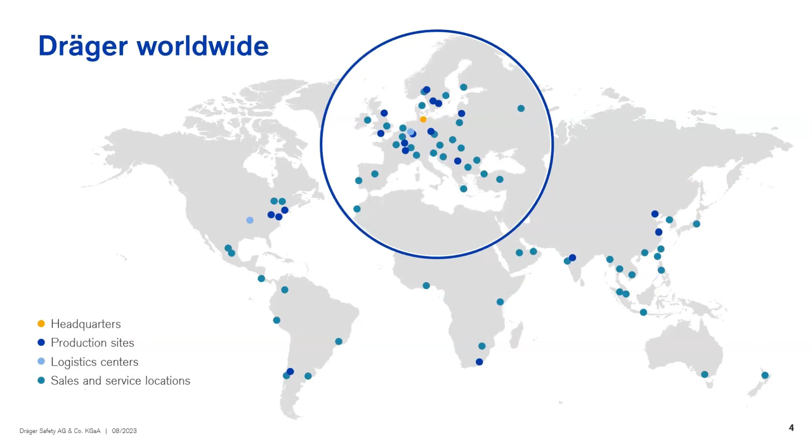Okay, so that's briefly all for the moment. Now it's time to have a look at the details about our topic today: some risks of gassing and asphyxiation in the special application of maintenance work. That's the part where I would like to say good luck and see you in a second. Thank you, Oliver.

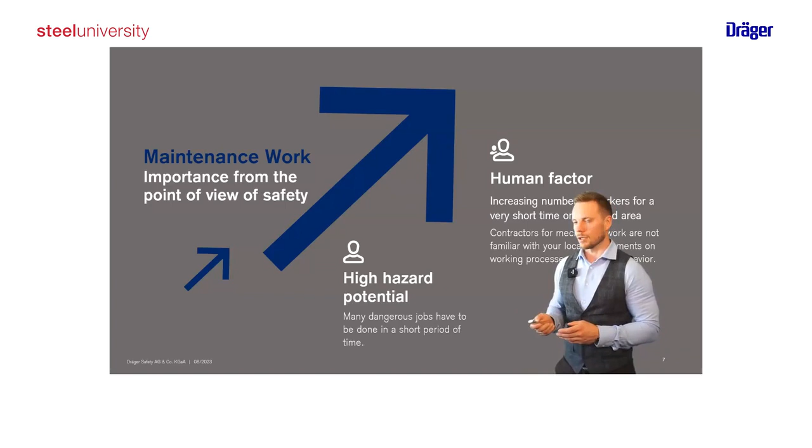In the last presentation in module 3, we already gave you some information about the risk, where they come from. In this first slide, I'd like to give you a small review to that. So when does the risk exist?

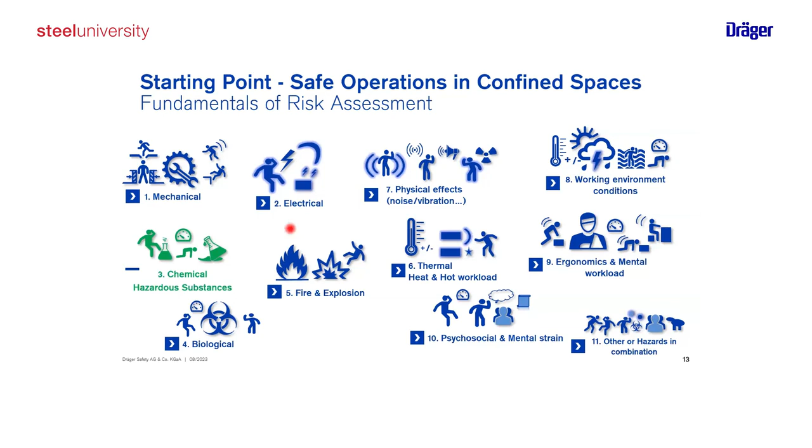In the last module, we did a very detailed look at all of these risk assessments and the fundamentals. Today I colored this one green - we want to focus on this topic because it's related to gassing and asphyxiation. We are talking about chemical hazardous substances that come through inhalation into your body and harm you there.

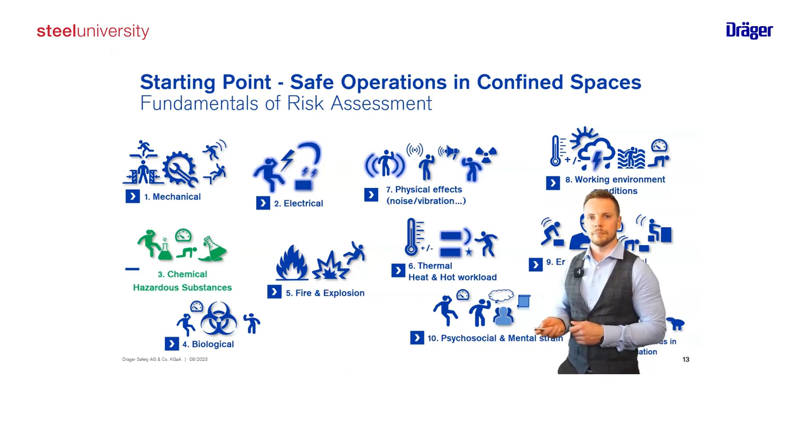But first, I'd like to show you a chart of the top 9 causes for fatalities in the steel industries from 2017 until 2022. There you can see the top 3 causes: fall from height - you may have heard a lot about this topic in the last year - and moving machinery, so mechanical hazards, also one of the most important points. And in 3rd place, we find our topic today: gassing and asphyxiation.

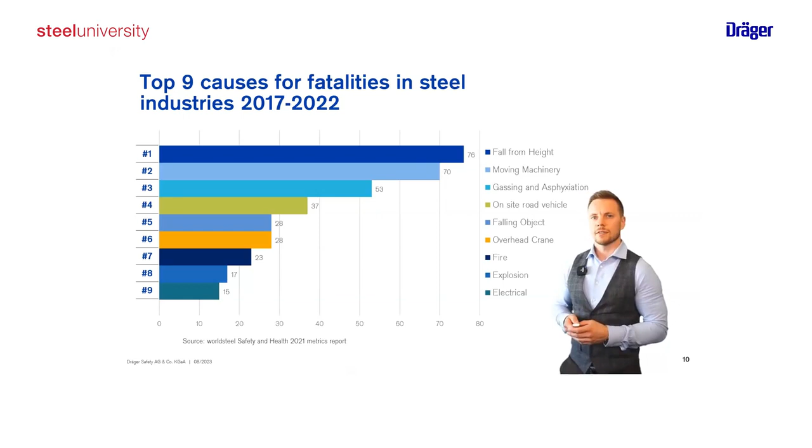So this is very important for your daily work, and especially for your work at maintenance time. Let's get a deeper sight into that.

The risk of gases and vapors - we have 3 different kinds of them. The danger of poisoning by toxic gases, for example. You can see them on these small symbols on every vessel or container. For example, we are talking about carbon monoxide, chlorine, H2S, and so on, and they are measured at the parts per million level, ppm.

Then we have the second part: the danger of explosion, which is caused by flammable gases and vapors, for example methane, and they are measured in volume percent.

And the last part, or the 3rd part, is the danger of suffocation - that's one of our topics today - for example due to the absence of oxygen, and this is also measured in volume percent.

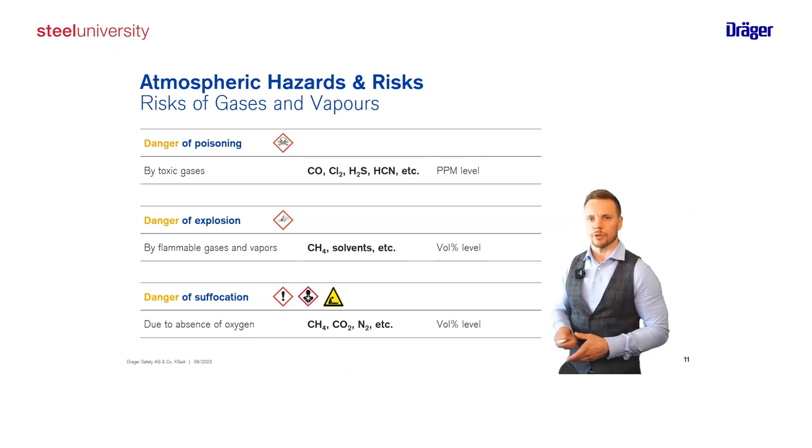Just a small view in our breathing apparatus. We inhale our normal air from the mouth or the nose, and that goes down into the lungs, the bronchi, and the diaphragm. And most of the hazardous toxic materials harm you there.

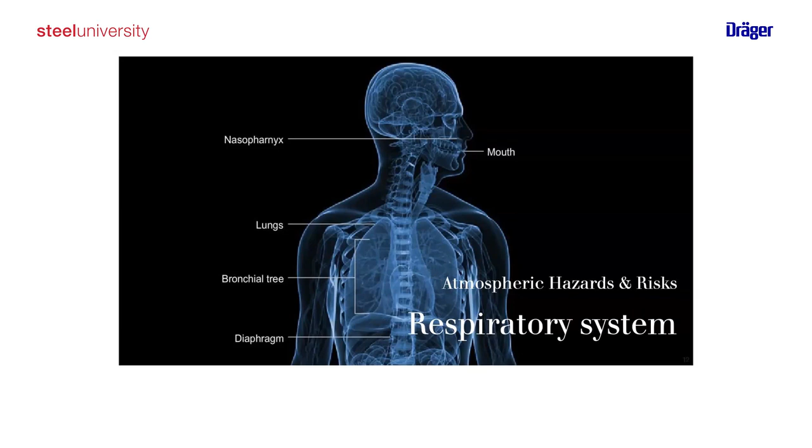This is also a small repetition from the last time. I think the most important substances in the steel industry are for sure carbon monoxide, also sulfur dioxide, and we have an increased topic for explosions, for example, made by hydrogen. That's one we are facing in the future, and also today more and more. But also ammonia for transportation is an important topic that becomes more and more important.

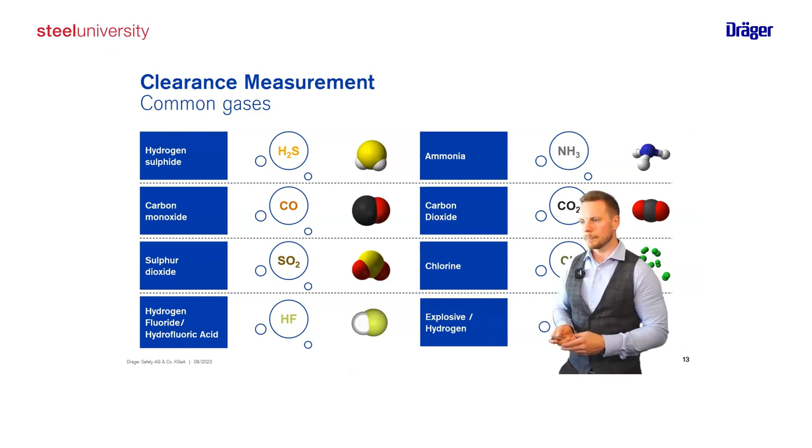Yeah, clearance measurements for common gases. So we have a lot of safety challenges in the steel industry. We have extreme temperatures, noises made by heavy machineries for example, and the steel is produced under some of the toughest conditions. That's nothing that I could tell you new. You are working with all of this every day, so you are the experts in how to produce steel.

Carbon monoxide, that's one of the greatest dangers, one of the most dangerous substances that we are facing in the steel industry. Because every fire, every production step will produce carbon monoxide.

But what makes it so dangerous? Carbon monoxide is not perceived by human senses, as it appears colorless and odorless, so you can't smell it. Nevertheless, it's very toxic and highly flammable, so that's something that you have to know.

One breath in, CO attaches to red blood cells, suppressing the body's oxygen intake, and therefore we need continuous monitoring for carbon monoxide in our ambient air and in the personal protective equipment. That is one of the essential things that you should be thinking about.

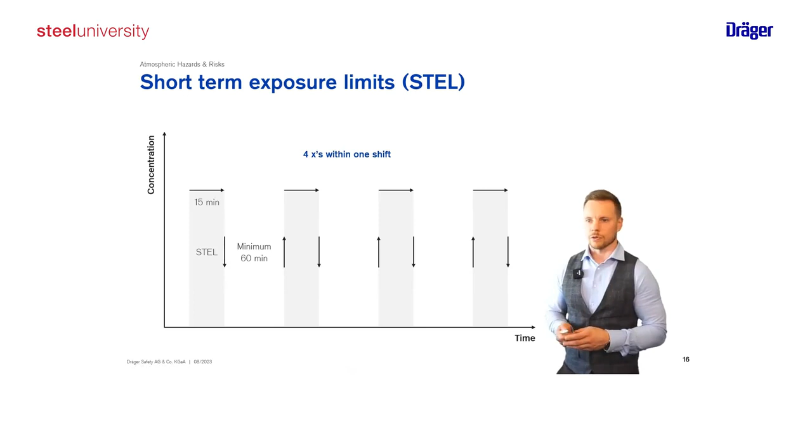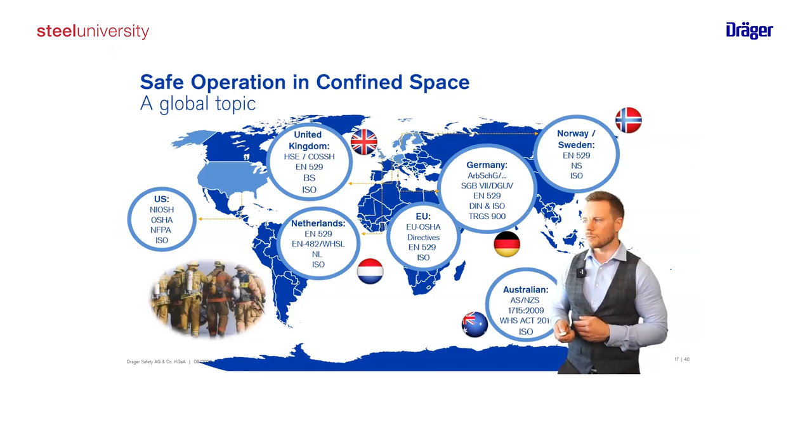Okay, but let's think about where all these toxic substances come from. We have 4 different sources that they come from. So the first one is dangerous substances come from the process itself. If you produce something, if you burn something, then you produce, for example, carbon monoxide, or sulfur dioxide, or whatever. So out of the processes, this is one source for dangerous and toxic materials.

But you can also produce dangerous concentrations with the working process. If you're thinking about welding, for example, you could produce carbon monoxide. So that's the second source where toxic materials can come from and influence your breathing.

And also from external processes, maybe if you think about having maintenance work just in one place of your site, and the other places are still in a production process, and maybe they have a leakage or something, then the working places in the surrounding area could be in contact with that and could be in danger of the leakage with the toxic material.

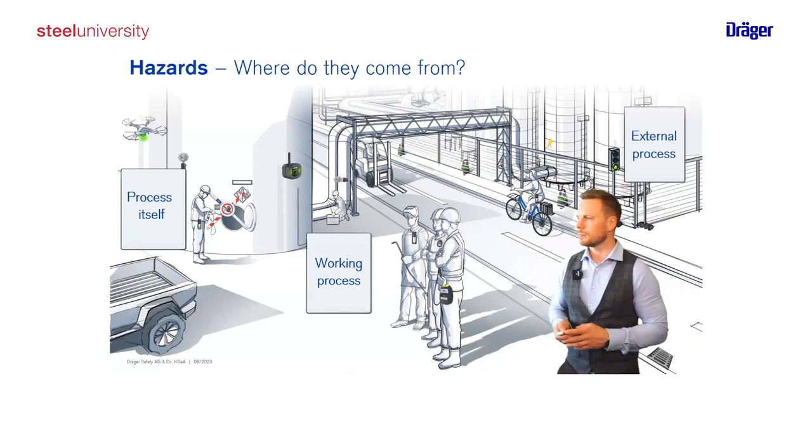And the fourth one, I already teased it now, is the leakage detection. So like you can see here in the picture, if we are working in a vessel, here we have a confined space, and this person is also well equipped with a protection suit and breathing apparatus, and there comes a toxic material out. The people in the surrounding area have to go away because we have a toxic area that could harm them. So they pull over their rescue mask and go to the safe place over there.

On the next slides, I'd like to tell you something about how we could reduce these hazards, and I'd like to show you this on a practical example, going from the planning of the turnaround to the maintenance work itself, and back to the production process.

So we come from the operational production mode in your steel industry. We have dangers like heat, noises, and gases like carbon monoxide, and therefore you have your fixed gas detection devices as part of the fixed gas detection system. You do your daily business with well-trained personnel. That's the situation you are very familiar with.

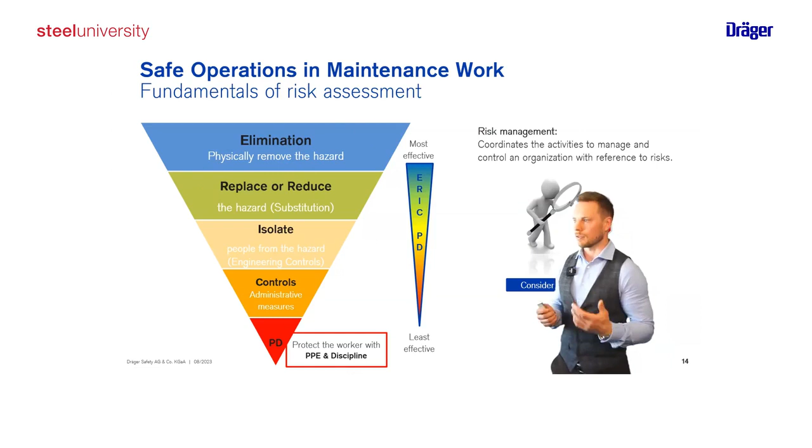And therefore, like I told you, clearance measurements are very important. For clearance measurement, you have to make sure your gas measurement devices are equipped with the right sensors, and that they are well tested and equipped when you need them. Please remember the dangers: suffocation, explosion, and also poisoning. They are very important to have the right planning for your clearance measurement.

But let's go further with our turnaround planning. The next step after planning our maintenance work is to prepare the work itself. For example, training—you trained your own personnel in the last step, and now it's time to train the contractors who come to your construction site to give you support for your maintenance work. First priority is always safety.

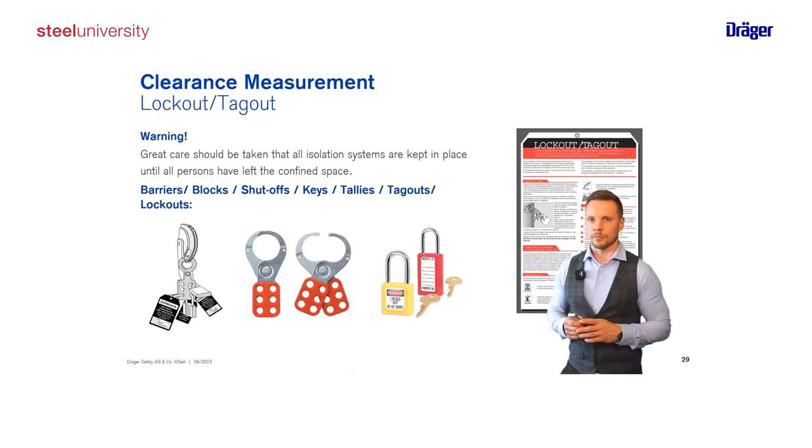And for this, one important thing is lockout, tagout. You always know the procedure. Great care should be taken that all isolation systems are kept in place until all persons have left the confined spaces. So in this part, just make sure of that, that's one point on the next slide here.

Verify the lockout, the test machinery to make sure it can't start up, for example. And after that, attach the lock and tagout devices so that nothing can start up again.

The isolation of the energy is also one part of this procedure. Isolate all energy sources by blocking, bleeding, and venting. Stored energy as found in springs, hydraulic, and pneumatic systems, you already know that. The shutdown equipment should be right in place.

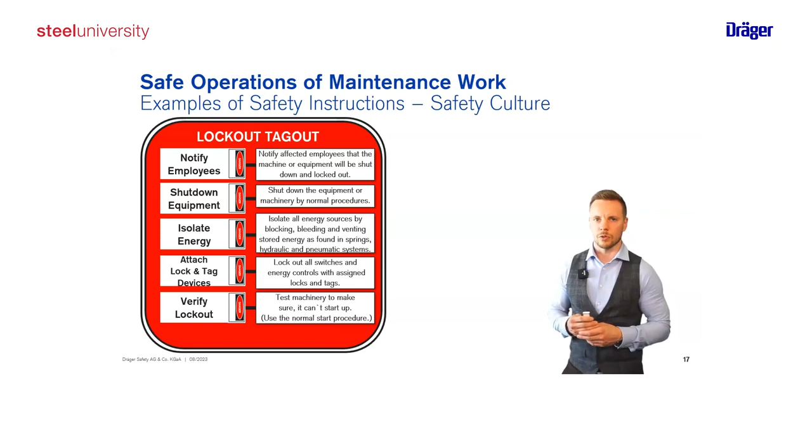And the last step, also very important, is that you inform and notify the employees. On this step, it's also important to train your contractor people and also your own people about safety culture. A safety culture usually starts with the first training to give them the advices, maybe 10 rules.

These are just examples, but they are quite well for every production site and every turnaround. So the first point is you are responsible for your own safety and for everybody else in your surrounding area. And the second one, for example, wear your protective equipment that is necessary for your job. Usually on all working steps, a gas monitor is one of these.

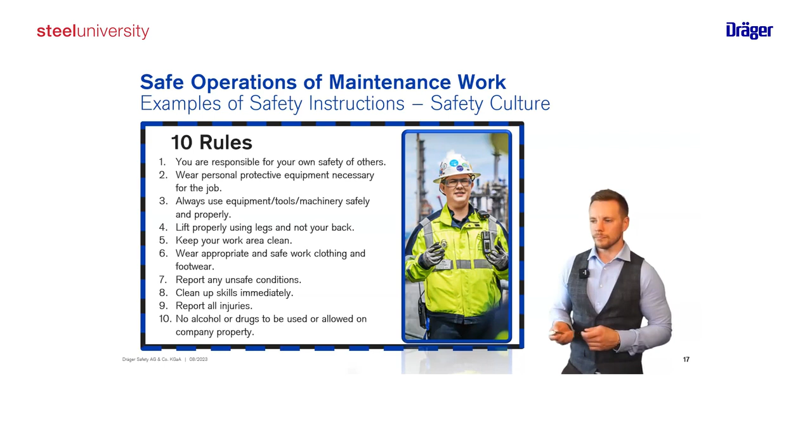Yeah, now everything can start. For example, confined space works or working in confined spaces. We talked about that a lot in module 3, and this here I just want to remind you about module 3. So you need a clearance measuring before you start the work, and you also need a continuous measuring when you do your work.

This is also very important, working in potentially dangerous areas. I think you know a lot of that. One point I want to make is that the responsibility for the working is on the working coordinator. That's also one reason I told you a few slides before that the training and introduction in the working place is so important.

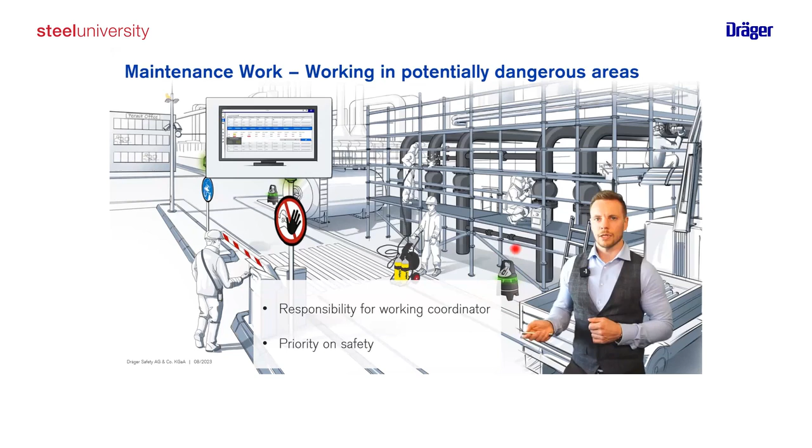And on the left side, you have somebody who's working with heavy machinery and under a breathing apparatus, so that's very hard work. And of course, for the area monitoring, for example, the Ex-zones are very important.

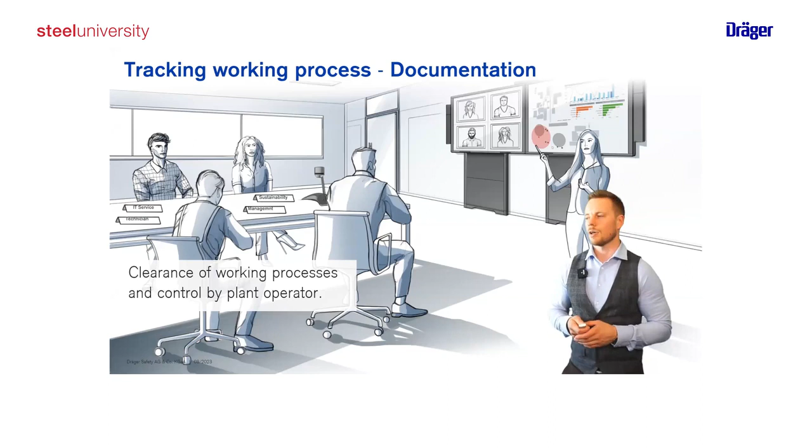The next step, tracking working processes, also very important. The clearance of working processes and the control of that has to be done by a plant operator from your side, so that you can make sure that everything is right in place and well worked.

And now we can go back to our production. After we controlled everything, therefore it's common business that we have control protocols from the manufacturer, to make sure that everything is rebuilt. For example, the lockout tagout system I told you before, and a lot of companies go over from lockout-tagout to lockout-tagout-tryout, for a higher safety level before starting the system again.

If everything is right in place and controlled and also documented, you can put pressure again on your system to come back to your normal working procedure.

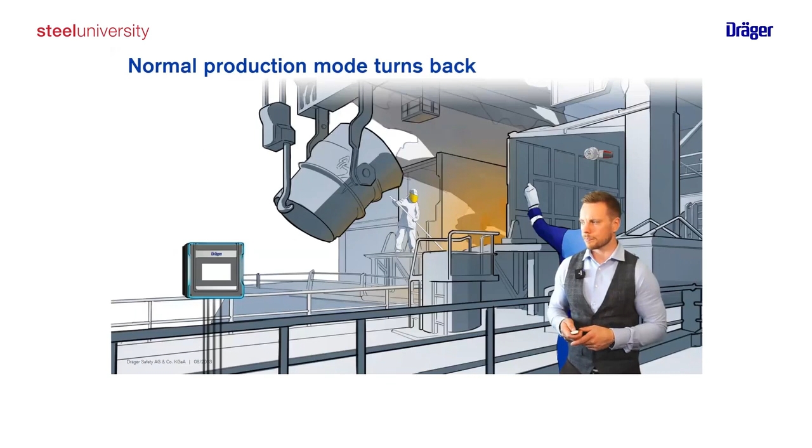And in the third part of my presentation, I like to give you a small view into the future, what's coming up, and how we could support you in your steel industry with digital solutions.

And therefore, I like to introduce one of our digital solutions, the ConHub, the Connectivity Hub. It is a platform that consists of a web-based front end and a cloud back end, and the Gas Detection Connect system, GDC, offers both asset management and live monitoring as a cloud platform.

Currently, all devices are gradually being equipped with Bluetooth interfaces, so you can see here the smart devices with Bluetooth interfaces, and these devices send directly back to the cloud, also planned for the next steps.

And they are tested, for example, in the workshop, and also documented. You can have all this information in the cloud backend over the GDC platform.

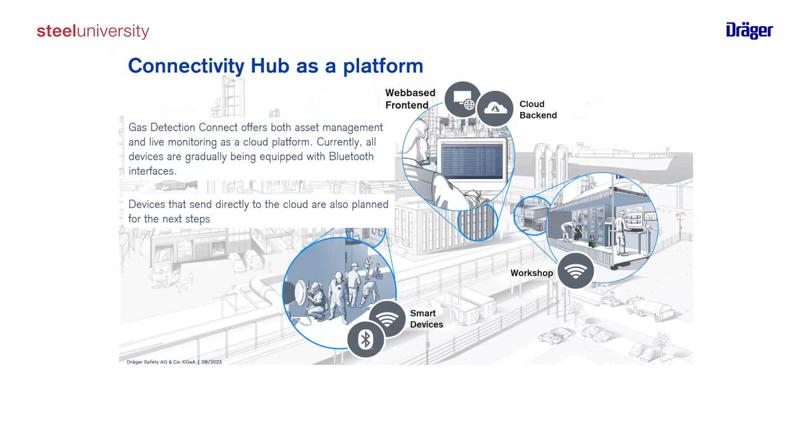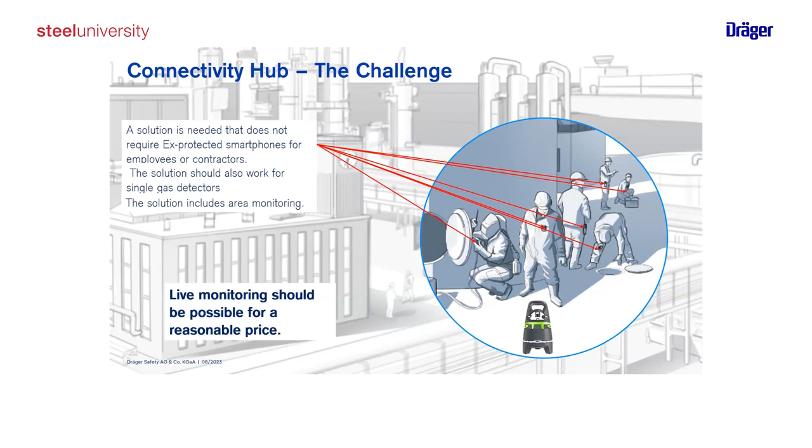But there's quite a challenge because you have so many devices in a very small area, and a solution is needed that does not require explosion-protected smartphones, because usually they have a Bluetooth connection. We also have the Bluetooth connection in our devices for the employees and contractors, and the solution should also work for single gas detectors, and of course the area monitoring. And the live monitoring should be possible for a reasonable price, of course.

This device is not intended to monitor individual workers. It's meant to give a deeper insight into a vulnerable area. So a single connectivity hub can forward the data of the devices in this area, for example, all of these ones.

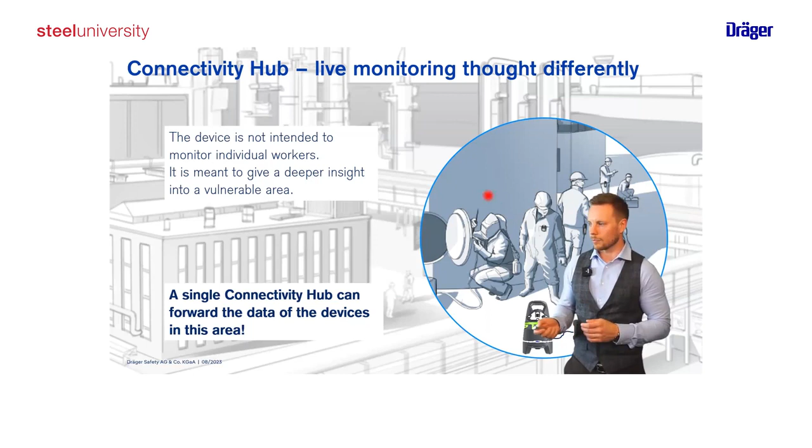So what is it for? It is for use in potentially hazardous areas, like I told you a few slides before, and in areas with maintenance activities, or also on accident sites. So we can use it nearly everywhere.

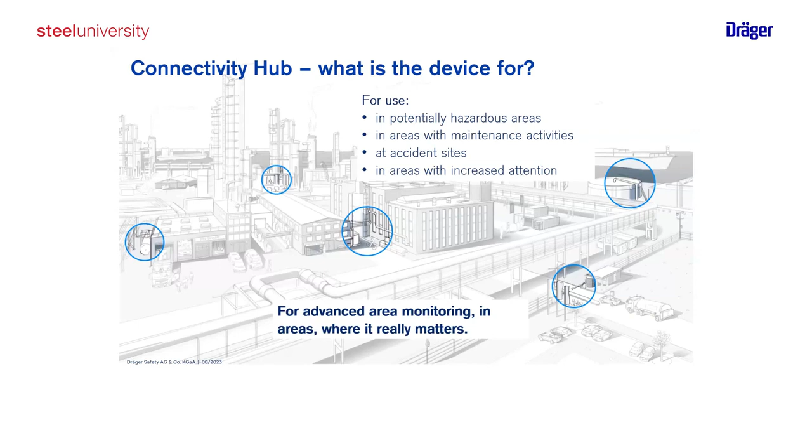So the ConHub is for advanced area monitoring in areas where it really matters and where you need it.

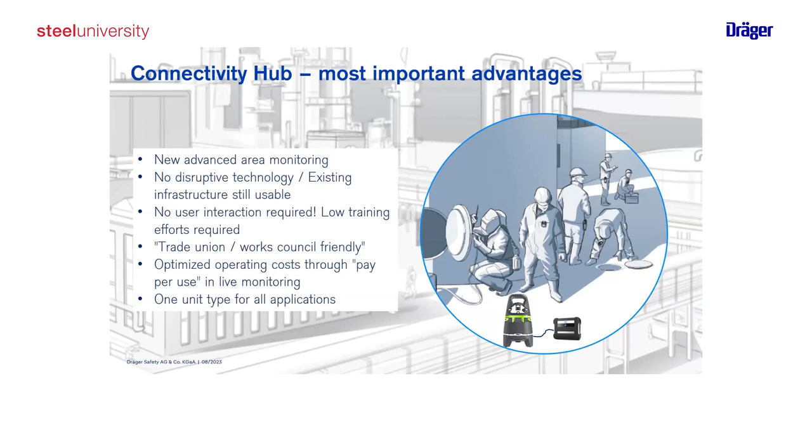So the most important advantages for this system: we have new advanced area monitoring, no disruptive technology, we build up on existing infrastructure that is still usable, no user interaction required so you don't need any kind of intensive training, low training effort required, we have trade union and works council friendly design, optimizing operating costs through a pay-per-use live monitoring, and we have one unit type for all the applications you need in your maintenance work.

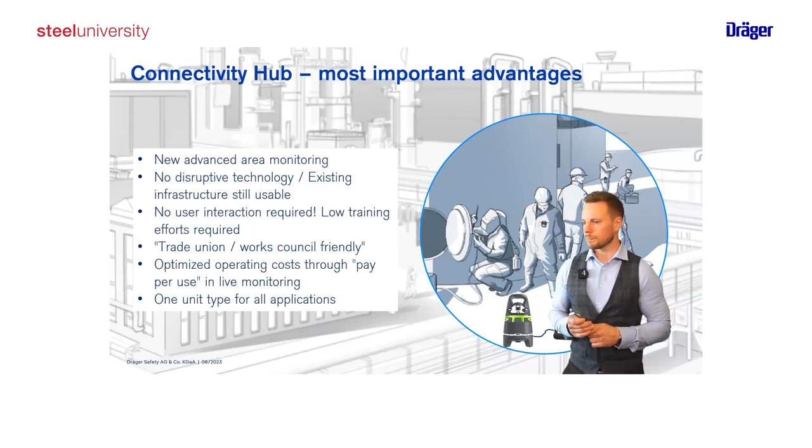Okay, so for the next slide, what's coming up, I'd like to hand over to Oliver again.

Thank you, René, and thank you for this great overview. And I personally like the digitalization part because this is getting more and more relevant. In the end, it's helping us make processes easier, especially when you have different companies involved, and here the communication part might be difficult. If you have digital processes supporting it, easy to handle for everybody, then in the end the safety will increase in parallel with the efficiency.

So a great thing, and perhaps this is the part we should have another deep dive on - we will see, depending also on your feedback. And for all of you who said, okay, very good overview, but we need more details, we want a deeper dive on it, then I can tell you that there are different options for you now.